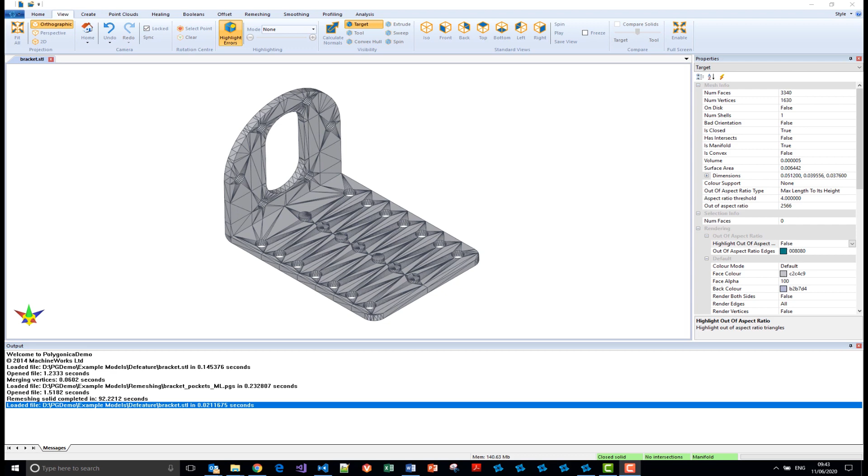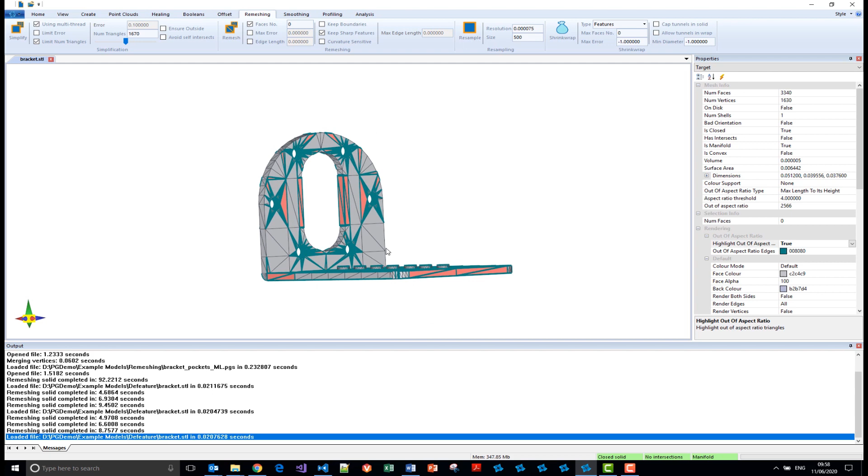So in this demo, I'm just going to show you remeshing on two small parts. If we look at this bracket part, it's largely prismatic. It's got lots of planar surfaces and lots of sharp edges. And if I highlight out of aspect ratio triangles, we can see there's lots of them. I'm sorry about the color scheme, but I guess it does make the point.

So if we look at the remeshing controls, there's quite a number, and I'll talk about some more of them later. But in the first instance, we're just going to do a uniform remesh based on a target edge length of 0.0005 - I guess this part's defined in meters. And we've got keep sharp features turned on, so we're going to preserve those hard edges or feature edges.

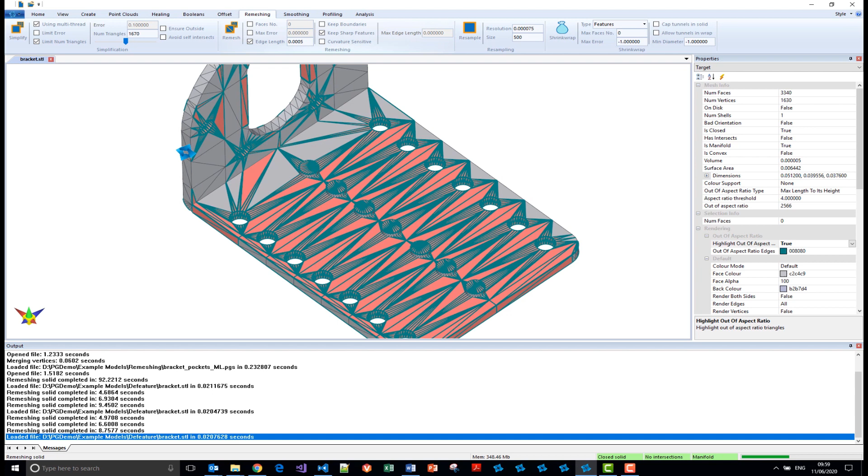Okay, so Polygonica's taken about 5 seconds to do that on my 4-year-old Dell laptop. You can see we've got a very nice uniform remesh across the surfaces here, and everything looks really good. The number of polygons has gone up from around 3,000 to around 60,000.

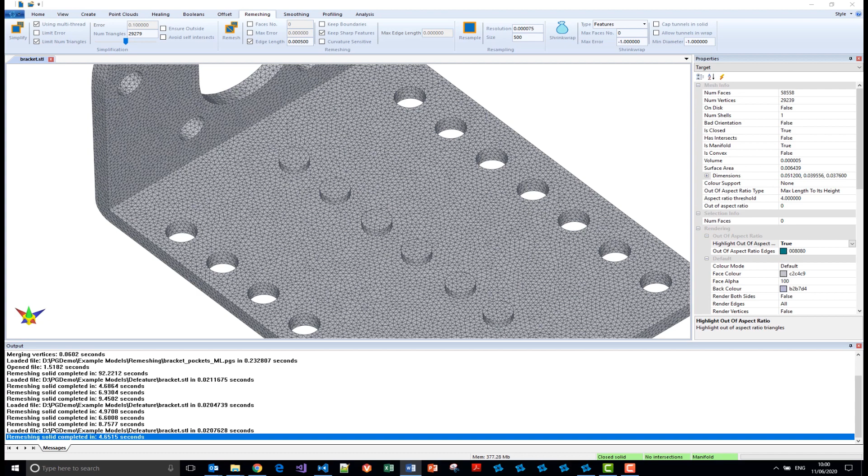Obviously Polygonica's remeshing can be used both to increase polygon density, triangle density, across an entire part or across a region of a part, and it can also be used to decrease it as well. So although we also offer simplification decimation algorithms to do that, it's very flexible. And we can also see that all these triangles now fall within the aspect ratio threshold. So the long thin triangles have gone and we've got an even spread of short fat triangles.

So now we'll keep the edge length the same. Let me reset the part - important to remember to do that - and click curvature sensitive remeshing. So in this case, Polygonica is going to add more triangles with shorter edge lengths in areas with higher curvature, and larger triangles with longer edge lengths in areas with lesser curvature or planar regions. So if I click that...

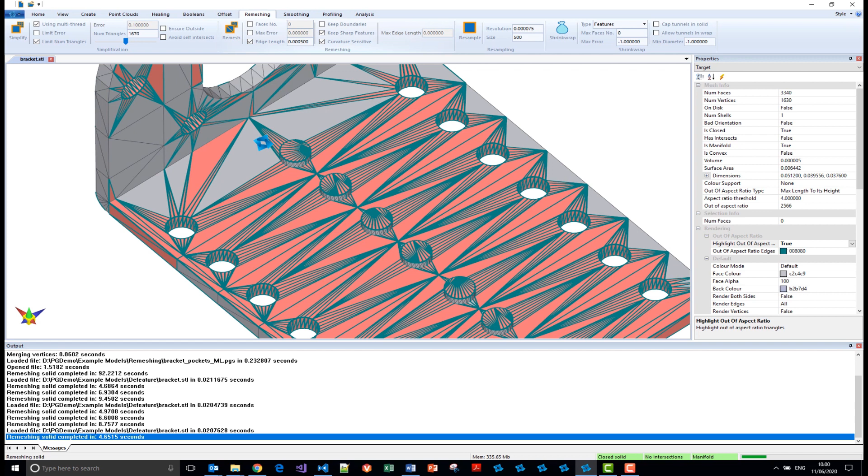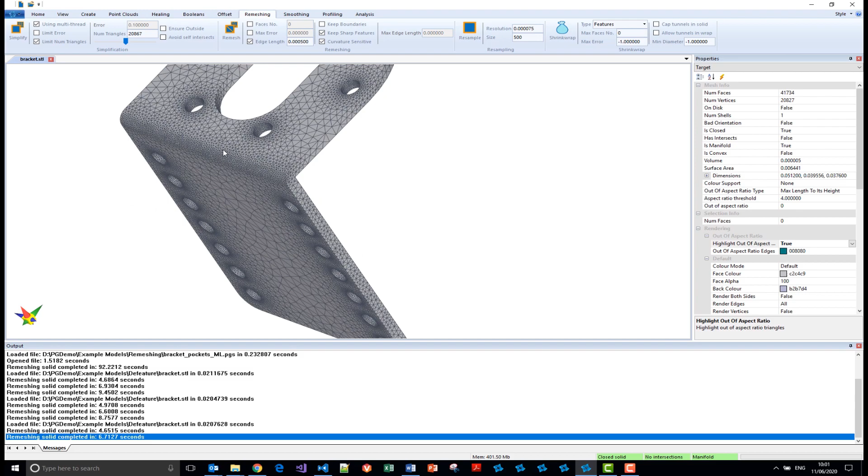So that's completed in 6.7 seconds, and now you can see we have a nice graded variation of larger triangles in the planar areas through to smaller triangles where they're required by the curvature. We look at the back side here and we look at this hinge. We've got a very nice result across the hinge, and again on this plane, flat planar surface, everything's looking really good. In this case, the number of triangles has gone up from 3,000 to 41,000, so slightly fewer than in the fixed edge length case or uniform remeshing case.

But we also have another control, and maybe a more sensible control, for curvature sensitive remeshing, which is the maximum error. This is a tolerance such that the resultant part after remeshing will always lie within that distance of the original part. So I'm going to set that one to 0.0001 - sorry about the small numbers here. And let me reset that. Okay, and remesh.

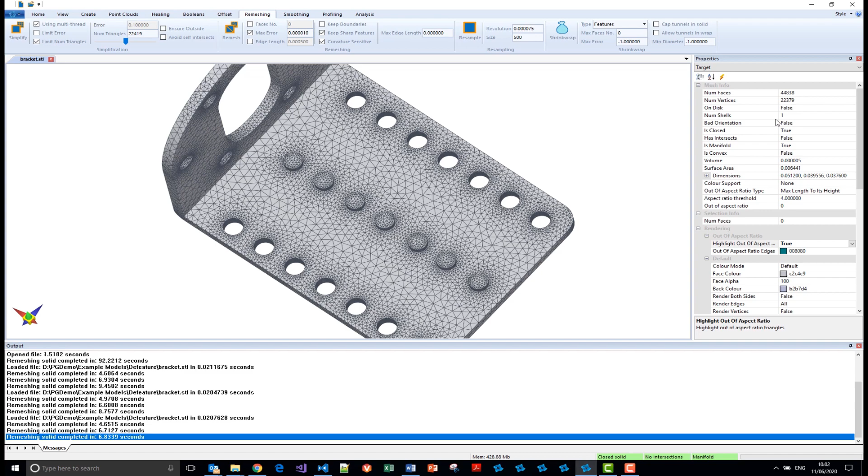Okay, and so that took a similar sort of time, 6.8 seconds. I chose the tolerance to be similar to the average edge length from the previous example, and we've got a similar number of triangles, 45,000 as opposed to 41,000. So it's a roughly similar result, but it's just giving you an idea of these different controls.

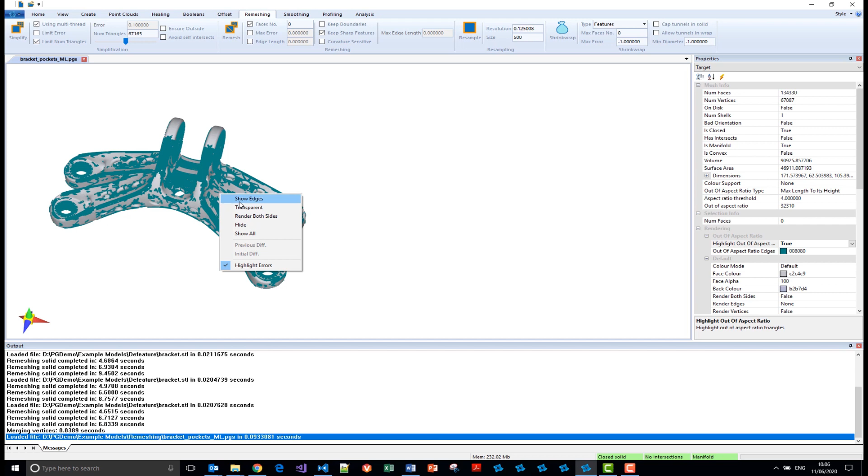Okay, so I'll close that part, and let's load up a slightly bigger part. So here we have, again apologies for the coloring, it's already highlighting the out of aspect ratio edges. If I just show you the edges, let's turn that off for a second. So here we have a kind of topology optimized type bracket with 134,000 polygons, which represents a 6.5 megabyte binary STL file.

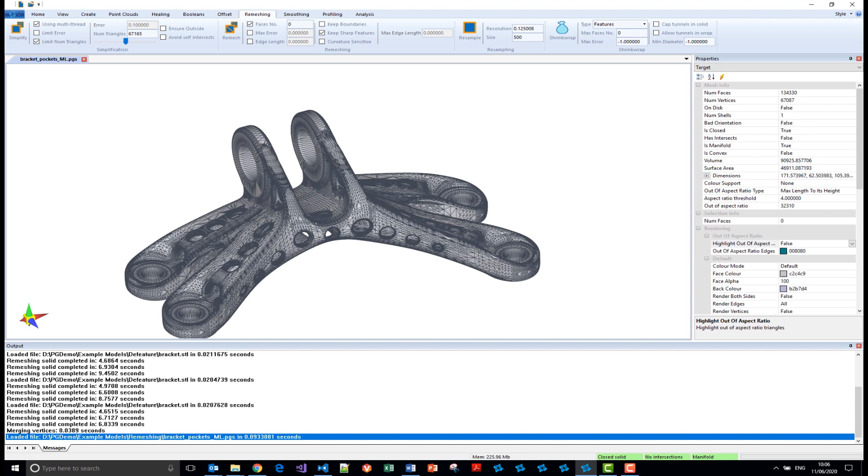And I'm just going to run through pretty much the same process I did with the previous part. So let's use a uniform remeshing with an edge length of 1 unit, which is slightly rough for this size of part, but I don't want it to take too long in this demo.

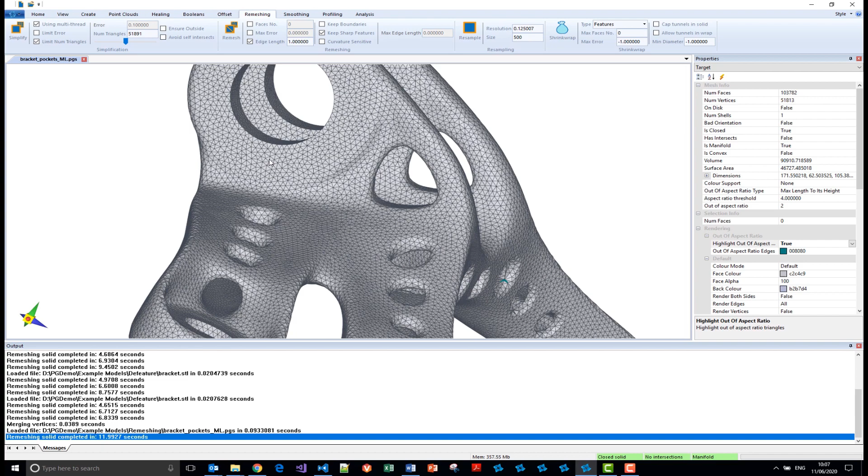Okay, so that's taken 12 seconds, and again you can see we have a really nice result. If I look at the holes in the base here, you can see that these are a bit rough, and really we needed a slightly tighter edge length to preserve that. But I guess it really depends what it is you're trying to do. As you can see, there's a nice uniform remeshing across this complex part.

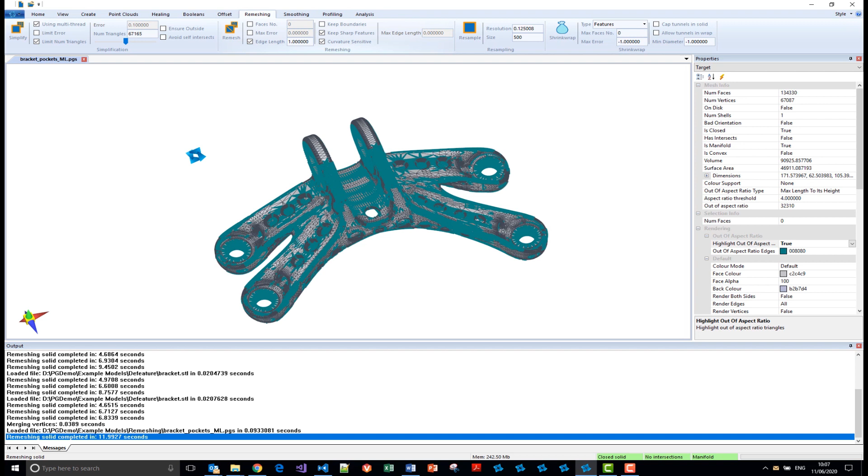Okay, let me reset that, and this time do curvature sensitive remeshing, but with the same edge length, or same target edge length.

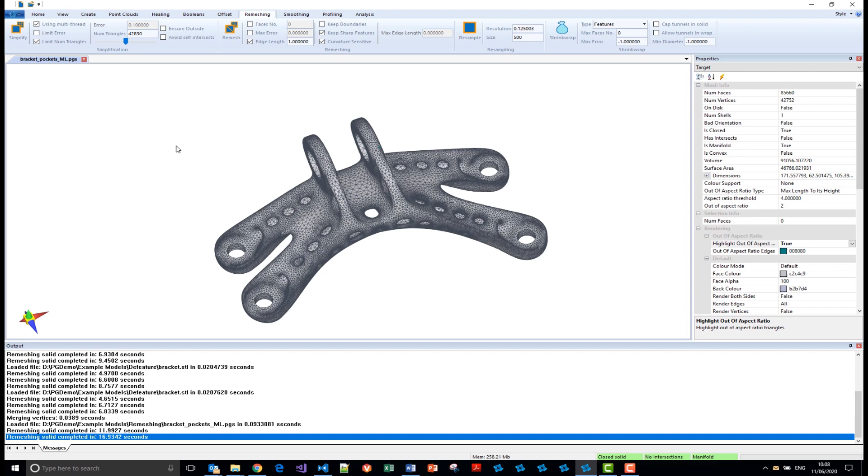Okay, so that's taken a little bit longer, 16, 17 seconds. But again, you can see we've got a nice curvature based result here, where we've got larger triangles in the regions with less curvature and more triangles in the regions with a lot of curvature. So yeah, another pretty nice result there.

Okay, let me reset that, and this time go for a maximum error of 0.1. So this part is 171 by 62 by 105, and I'm using a tolerance of 0.1, and let's get that going.

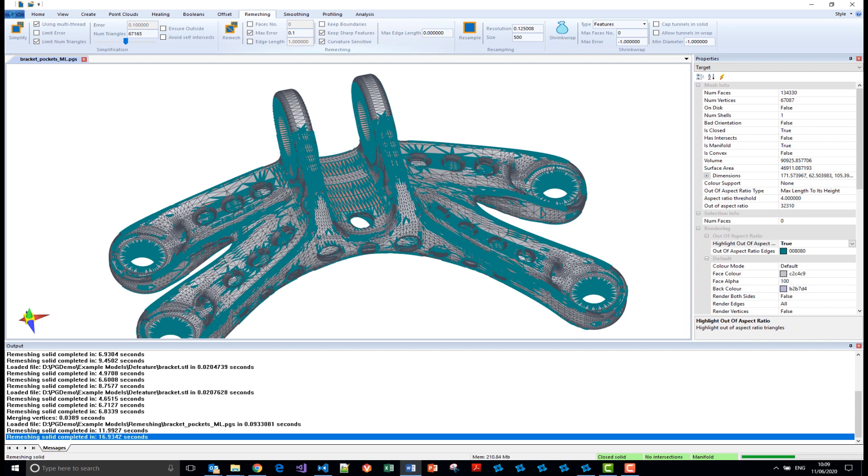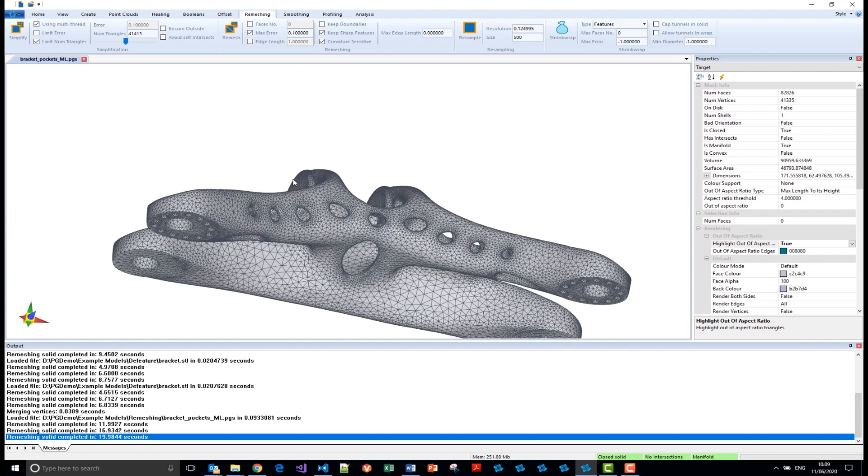So I forgot to say that the previous result dropped the triangle count slightly, I think it was originally 130,000 and it dropped down to about 100,000. And again, I've tried to pick a maximum error that gives a similar result to the target edge length, and in this case the number of faces has dropped to 82,000. You can see the result looks pretty similar. In this case it took 20 seconds. We've got a similar sort of edge length around these holes here, etc.

Okay, so that's a really quick overview of some of the new remeshing that's coming in 2.4. Please note also, remeshing can be controlled using a target triangle budget. So in this demo we call it faces number.

So you can specify a desired number of faces, and Polygonica internally will convert that in effect to an edge length. And also this keep boundaries option allows you, if you want, to keep the vertices on the boundaries of open edges preserved so that they don't get changed, and it really depends on your use case whether you want that or not.

And finally, the max edge length option, that prevents triangles in the curvature sensitive situation from getting too big. So obviously if you had a huge flat plane, you could get very, very large triangles, which you may not want. You may want to restrict it and keep an even spread of smaller triangles across the planar area. And so that's what this max edge length parameter is for.